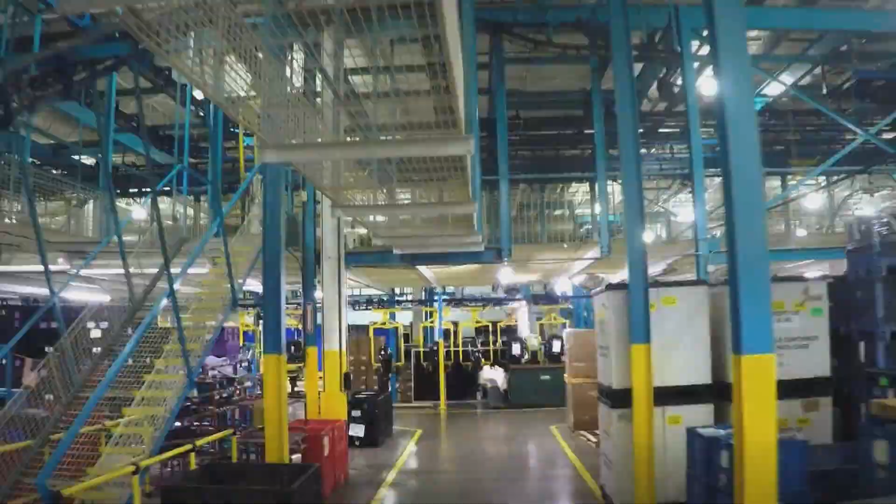Ah, lake life. It's hard to beat a great day on the water. Water sports have long been a favorite summer pastime, and they continue to grow in popularity, most notably wake surfing.

You might think you need the ultimate wake boat to get out there, but there's one company in Minnesota producing products to ensure everyone catches a wave. And they're headquartered where else? Right here in the land of 10,000 lakes.

I grew up surfing in California, and being landlocked, I'm like, what a better way to get out there and enjoy the water than to start wake surfing.

Chris Clover's longtime love of riding waves inspired him to start Mission Boat Gear. I just looked at the boating market. The boats are awesome, there are great board brands out there and equipment, but there's not a boating accessories brand that really stands out. And he did just that. From day one, Mission has been creating waves in the boating industry, pun intended.

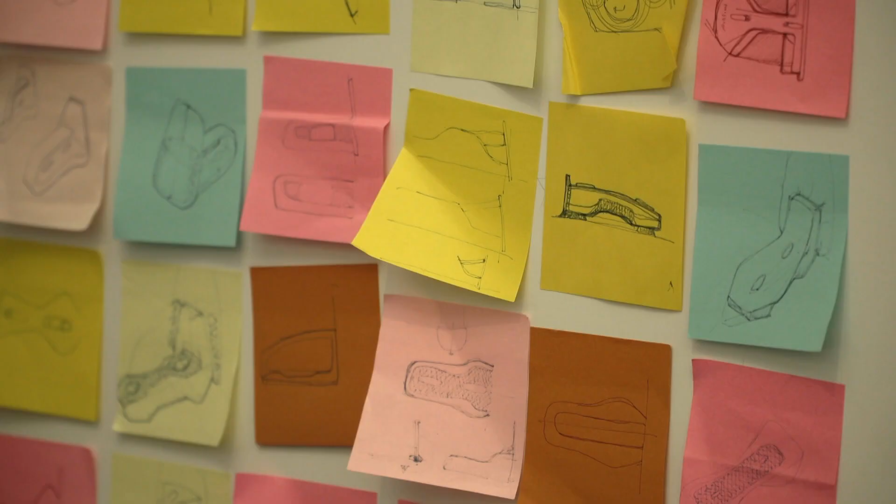Mark and Chris make it sound simple, but they clearly spend some serious time on research and development. Yeah, I gotta pick this up because this looks a little different than the product that we made or we're about to make today. Hello?

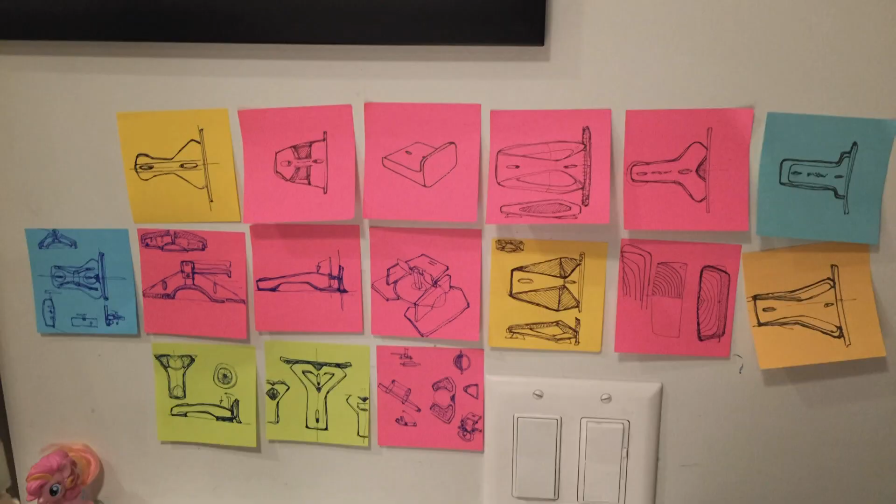So this is one of the early prototypes. There's probably another 50 or so of these things kicking around the back. Just how many prototypes? I would say 100, countless, yeah. There's pictures of us with our stocking caps on in the back of the boat in the late fall with a jigsaw.

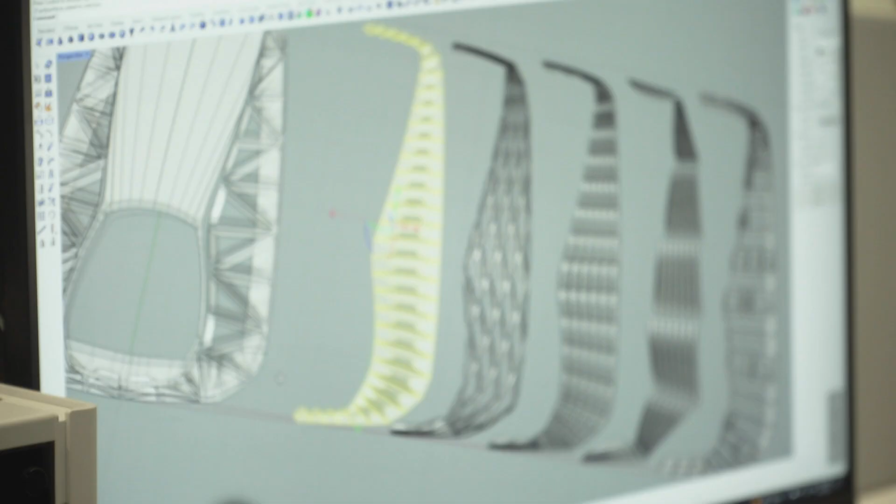A process that has since been perfected, and it starts right here at Mission HQ with engineering. So I'm an industrial designer by training, so it's more of an art-based program. It's closer to a graphic designer than an engineer, but focusing on three-dimensional products.

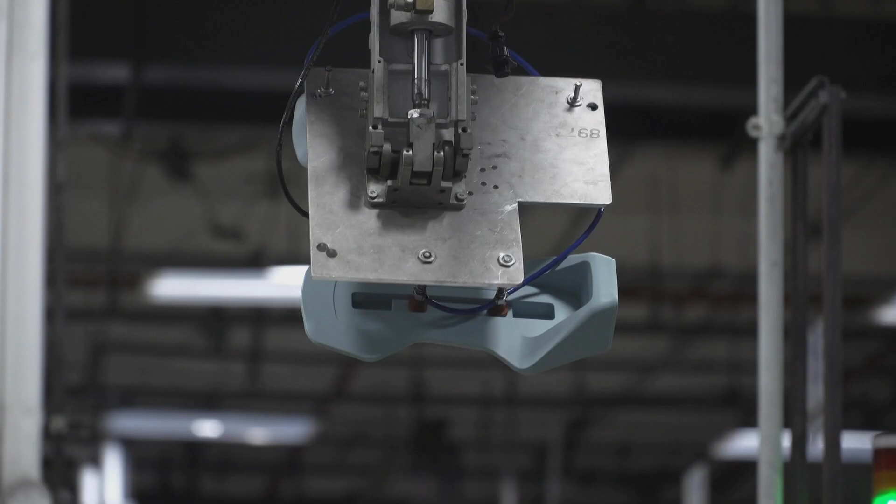When Chris has the final design, it's sent over to Plastech Corporation, where the Delta starts to take shape. Oh god, the next batch is coming. I gotta hurry. When we get back, we head there to see how it's done.

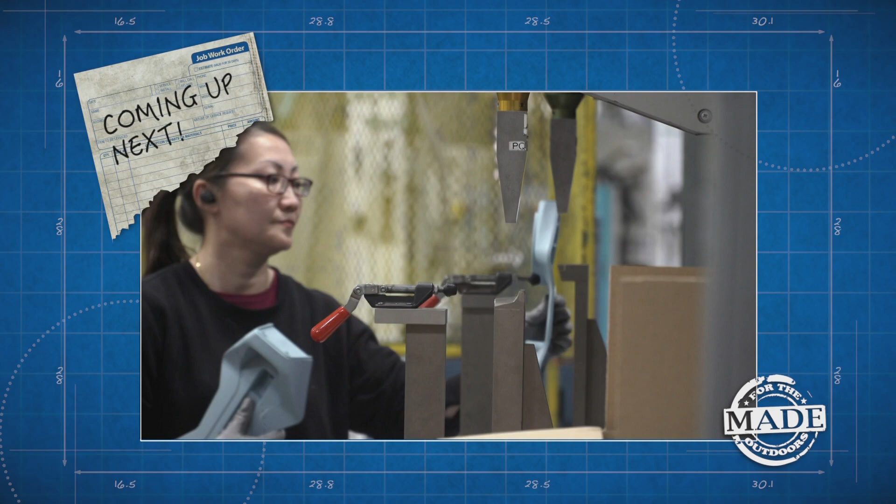Mission Boat Gear's first product was designed for the sport of wake surfing. But their goals transcend the water.

When we think about what Mission is and how we identify the business, it's an outdoor recreation and lifestyle company. We are on a mission to create innovative products and bring things to the market that actually help people get outside and have a good time.

Having fun means fun products, but it all started with this. Delta is an amazing product. It is product number one. It's the reason that Mission is really on the map.

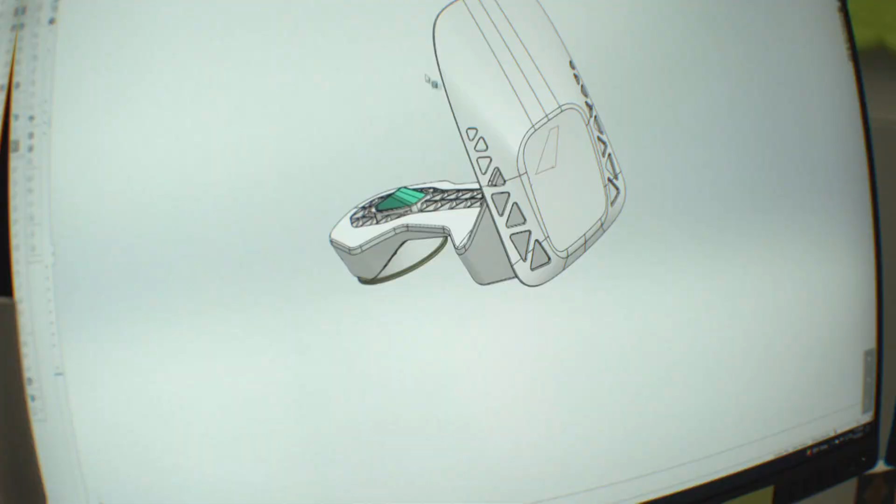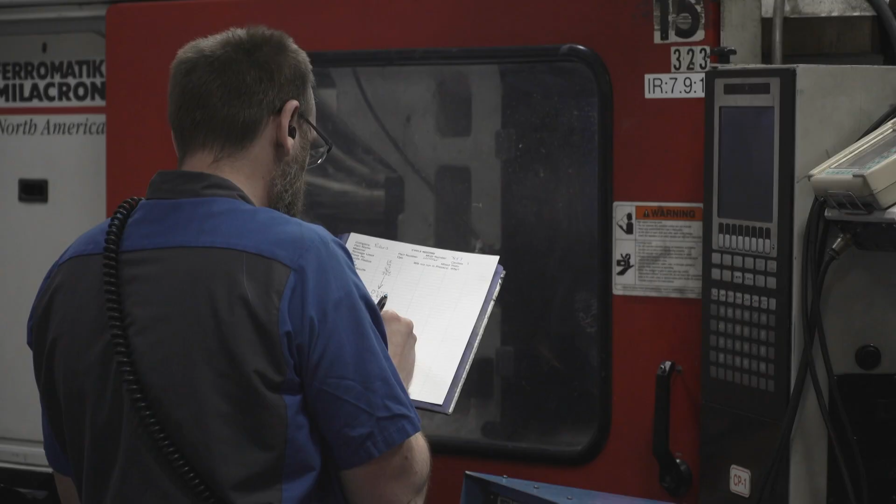Once engineering drawings are finalized, they're sent to Plastech Corporation in Rush City, Minnesota. That's when longtime Plastech employee Alan Johnson gets started doing what he does best.

Plastech is a custom injection molder. We do custom injection molding, so we do not have any proprietary products, we mold parts for our customers. We're a 24/7 operation. We've been in business about 65 years.

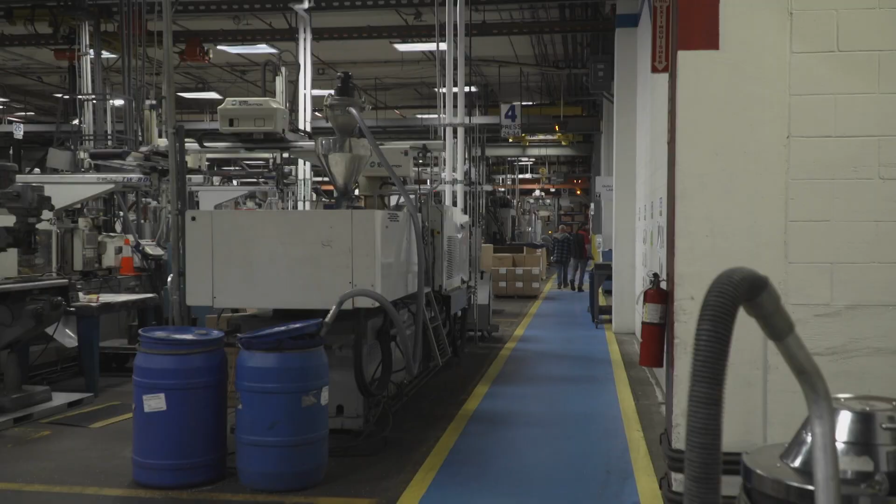65 years, and Alan has been here for most of it. 49 years, long time, my whole life. When it comes to the Delta, he knows it inside and out.

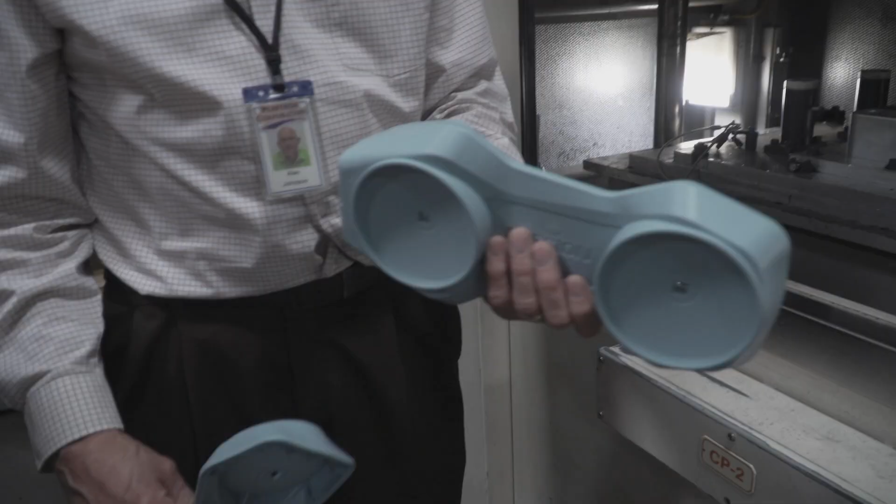The injection molded parts that we make here is the main body, which is the top and bottom. We make the soft suction cups that actually hold the device on the side of your boat. And then there's a little lever, a little blue lever on top. That's what you pull to release it off the side of your boat.

Alan, why don't you show us what we're working with? Let's take a look. Today we're molding the main body components, which starts with raw materials.

So here's some of the raw material. You see the white part? That's a natural polypropylene resin, just like milk jugs are made out of. And see the little pieces of blue? That's the concentrate dye, that's what makes them blue.

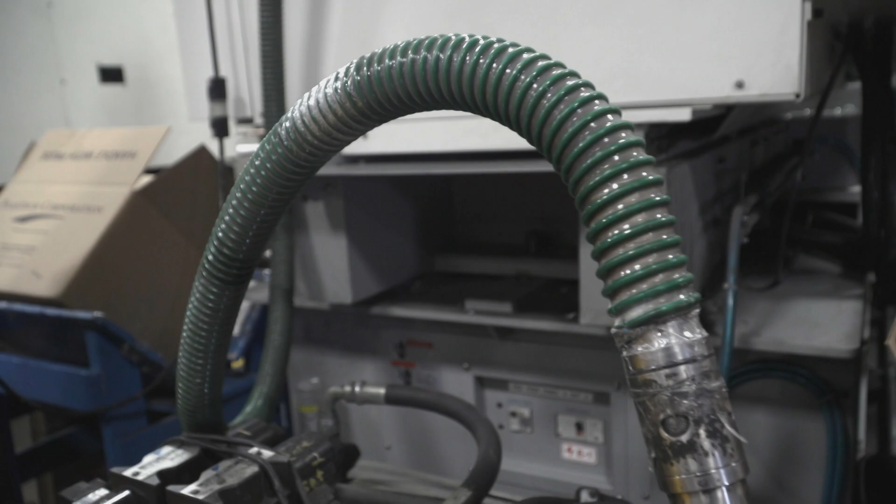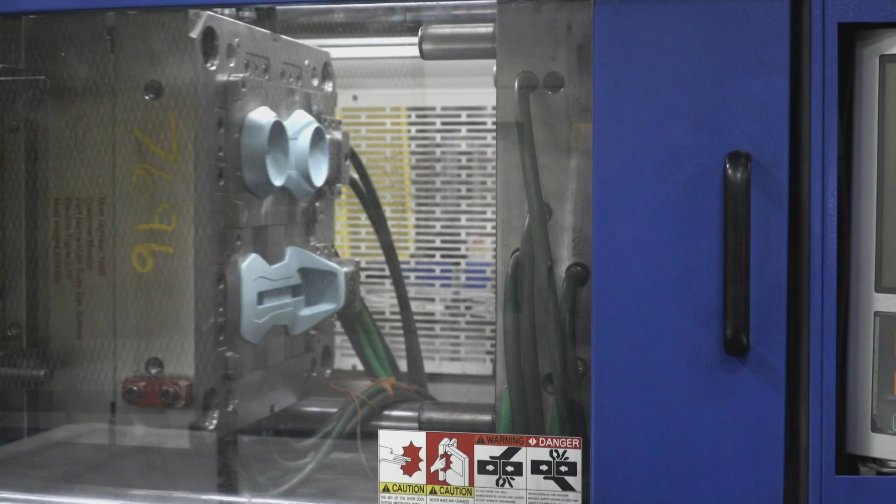The pellets are loaded into the injection molder and heated to 440 degrees Fahrenheit. From there, the liquid resin is injected into the mold. It's cooled to room temp in a matter of seconds, and voila. The whole injection molded process still intrigues me, from pellets to parts in a minute.

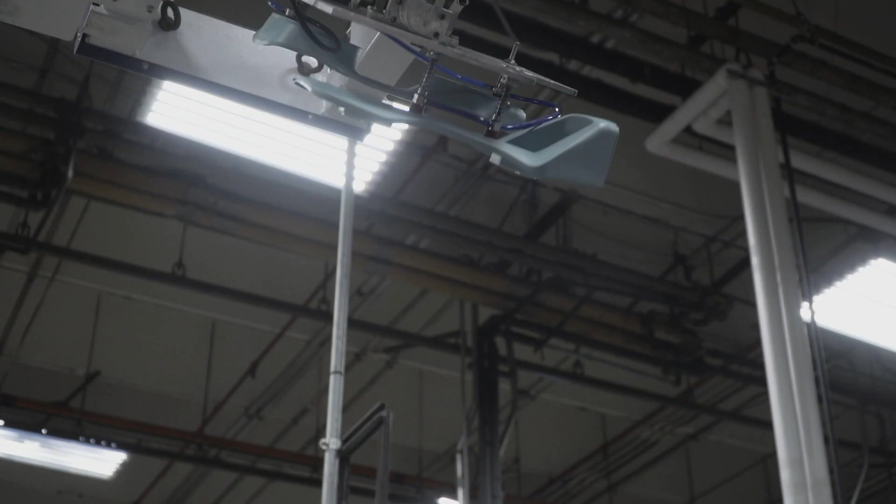A robot picks the components from the mold and leaves them for an operator like my new friend, Amy Vang. Her job is to oversee the sonic welding process.

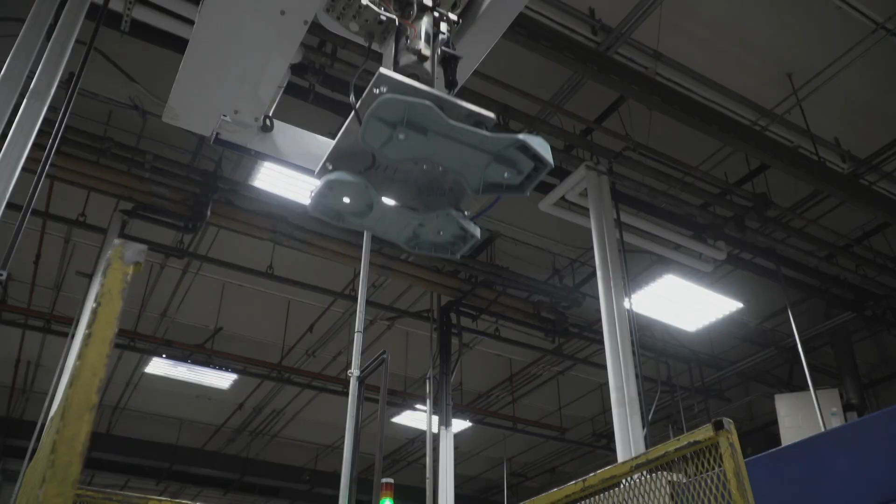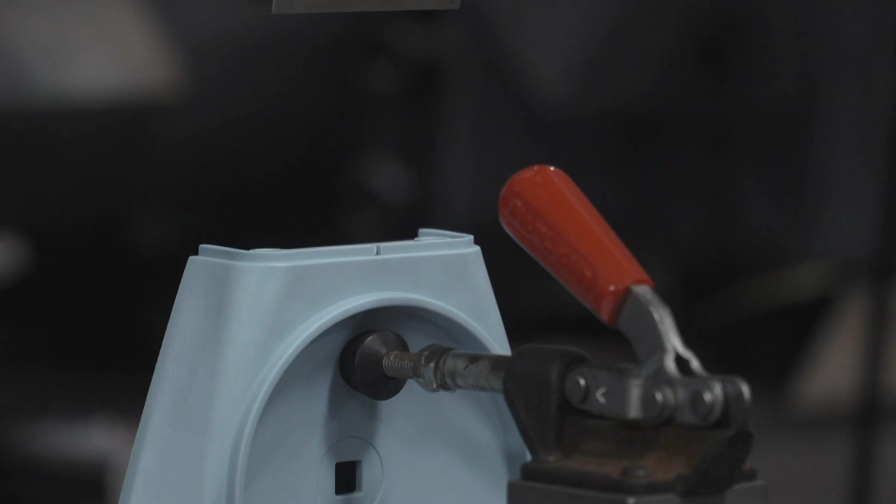So when I get my product, I look at it, making sure that there's no dye streaks, there's nothing wrong with it. So I place it on here. It fits a certain way. Put in my inserts, hit the two black buttons. Take it off. And there you go. Inserts are in and good.

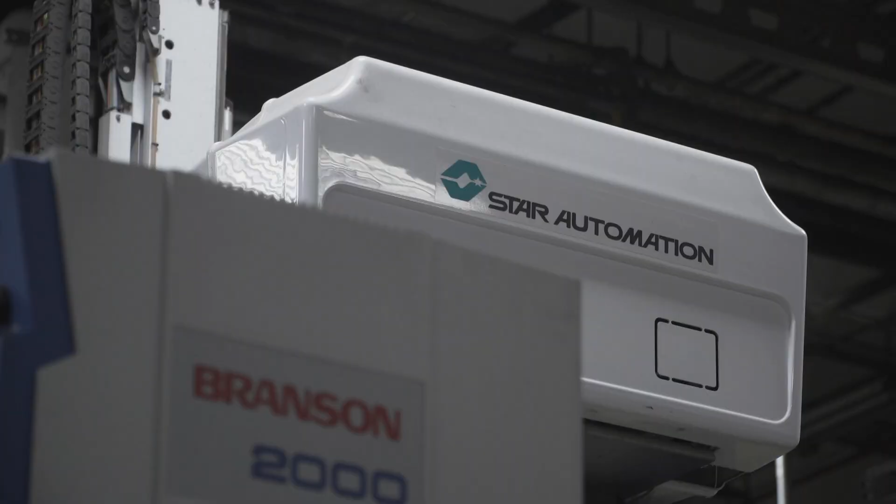All right, so we're waiting for our next parts to come down. Those are mine. Kind of a game. You have to make sure you're done by the time the next parts come out. I kind of like that. We'll see if I still like it once the real game starts.

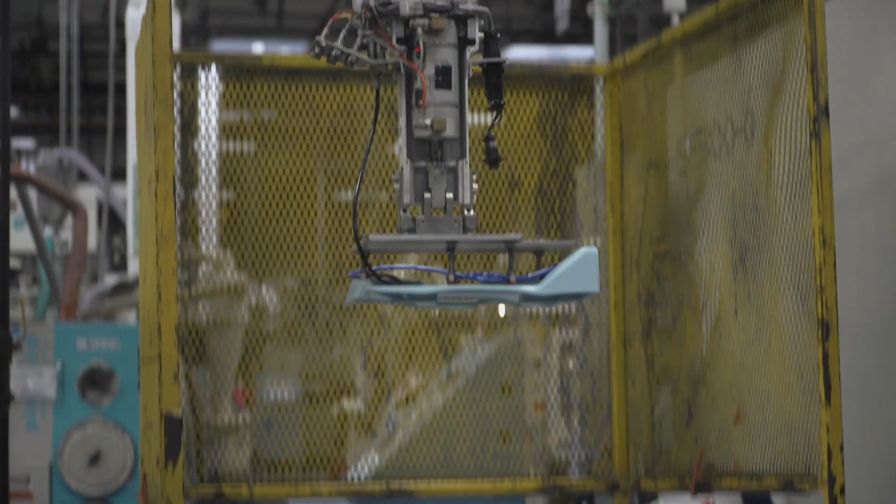Hey, incoming. It's pretty interesting. When they come down off of this, they're still very warm. So they're warm on the hands because this just got melted and now it's back cooling down. So it's kind of cool. All the way to the bottom, right?

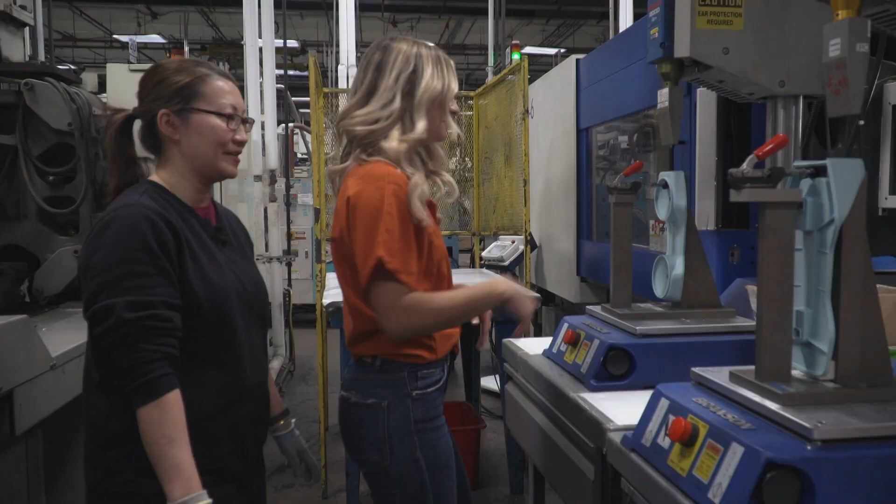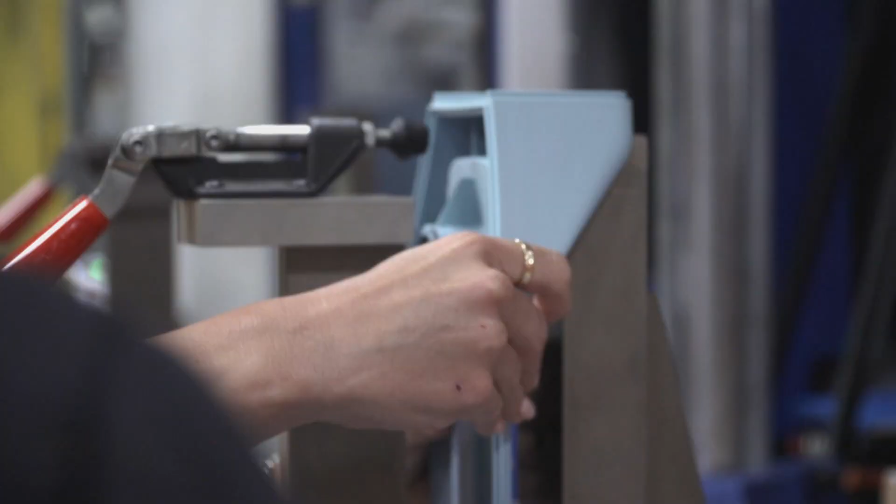Oh God, the next batch is coming. I gotta hurry. Okay, boom, boom. Woohoo, that's kind of fun. This time goes in this way, right? Okay, got it. Comes off, nice and flush. I gotta get out of here, I'm holding her up.

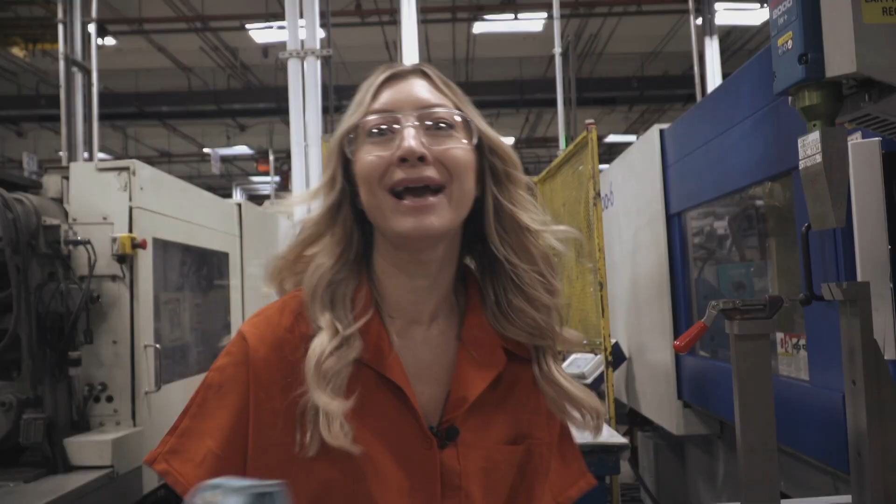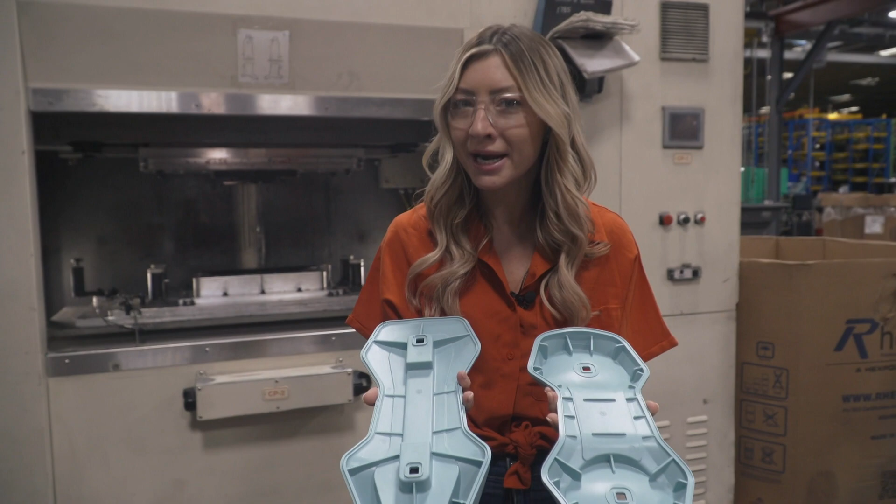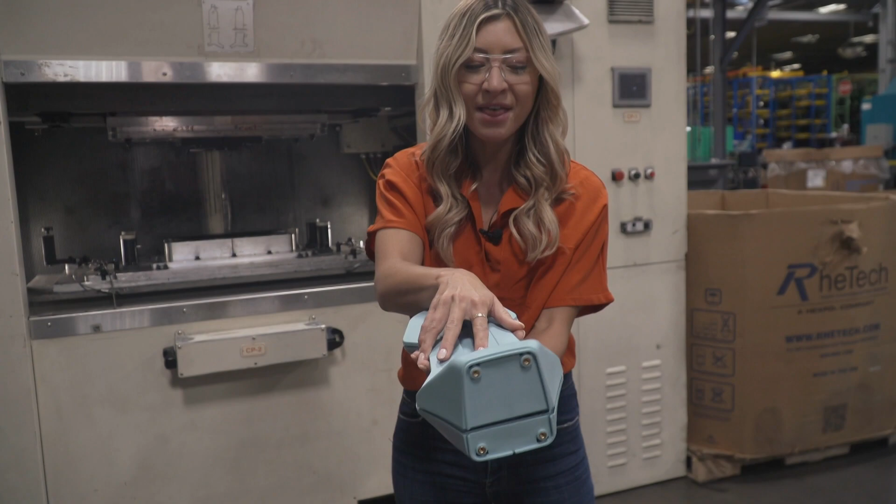We've got our main body parts all done, and now they're headed to vibration welding. Let's go. Our two main body components are ready to be put together, and it's a pretty unique process. Put that in there, and that in there. So what's gonna happen is these two pieces are gonna come together, and that vibration is gonna cause enough friction that it's gonna melt that little ridge and create a watertight seal and come out as one solid component.

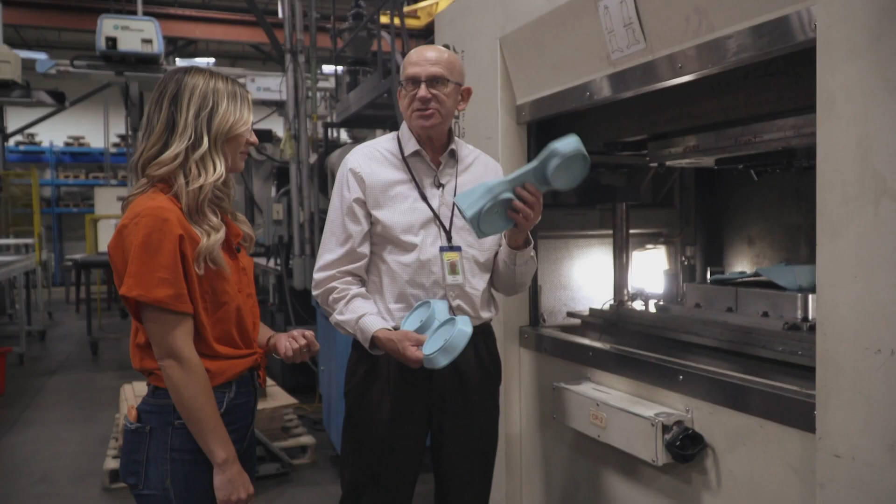Hey Alan, what do you think of our finished component? Now this is then ready to go out to the assembly department and be assembled into the finished product. That easy. That easy.

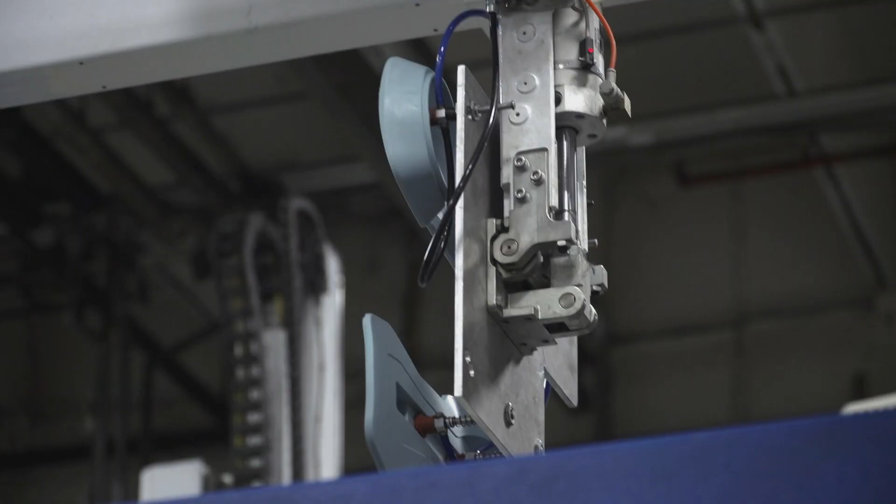Welcome back to Made for the Outdoors. We made it to Plastech Corporation here in Rush City, Minnesota. They do all kinds of different plastic injection molding, including all the plastic components of the Delta.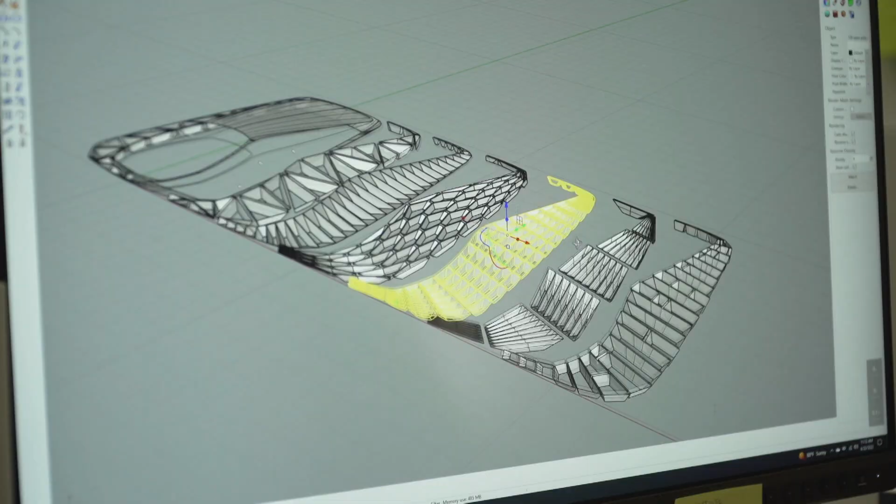Mission Boat Gear's Delta product has gone from 2-dimensional to 3-dimensional. This is then ready to go out to the assembly department and be assembled into the finished product, and into our hands for assembly.

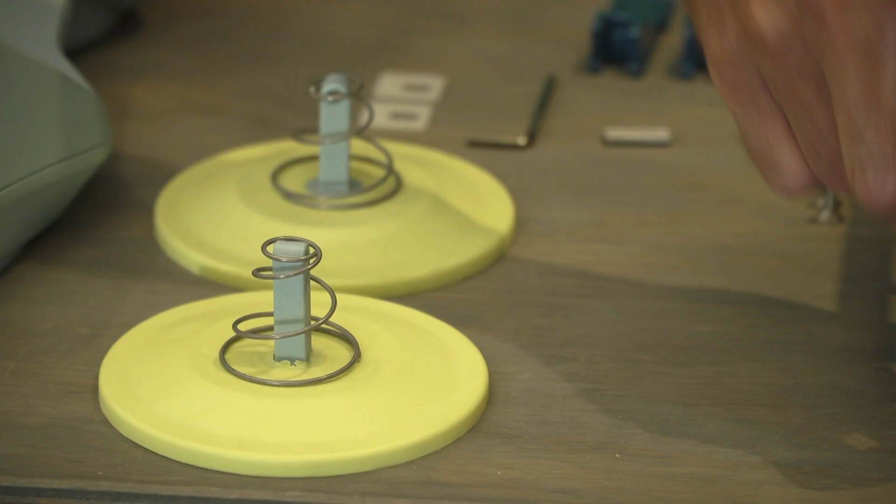So we are ready to assemble our Delta here, and typically this doesn't happen in-house, but I'm kind of gonna make you guys a test here and make sure you still know how to put this together. Do you think you're up for the challenge? I'm ready to accept the challenge.

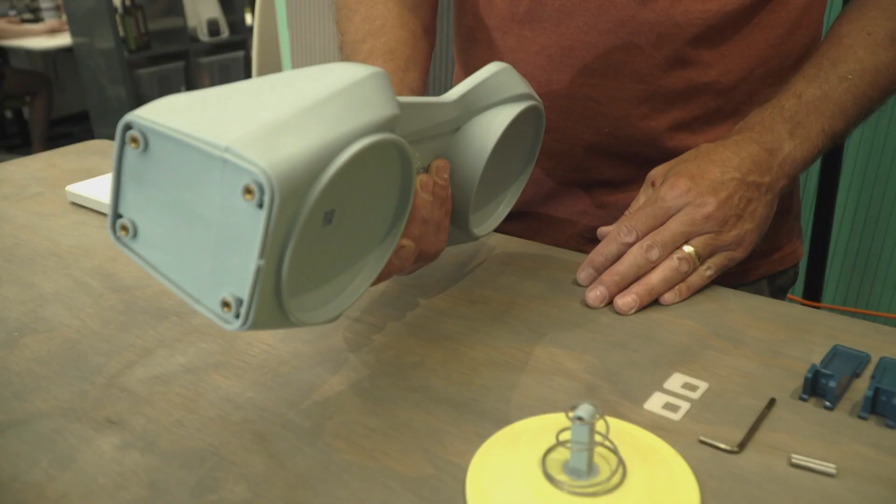I love it. Okay, so first, let's talk about all the different parts that we have here. We can start with the main body. This is basically the foundation of the entire product. It's got an attachment in the front for the mount, the main plate. And then there's suction cup features here that will mount the suction cups on, and that's what attaches the Delta to the boat.

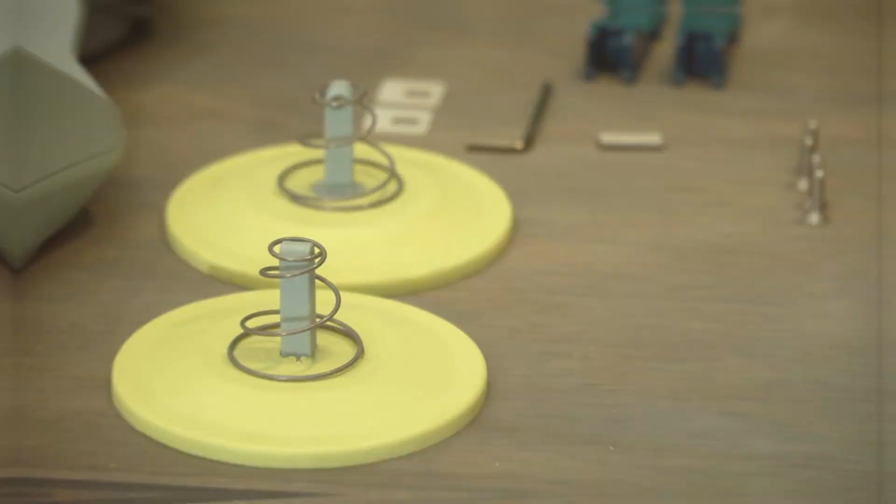So these are the suction cups. There's something that's specifically designed for this particular product. They've got a loft in there so they'll adhere easily to boats that have different curves and shapes into them. And then the springs help attach the suction cups. We got the levers that apply the force that really seals that down tight onto the boat.

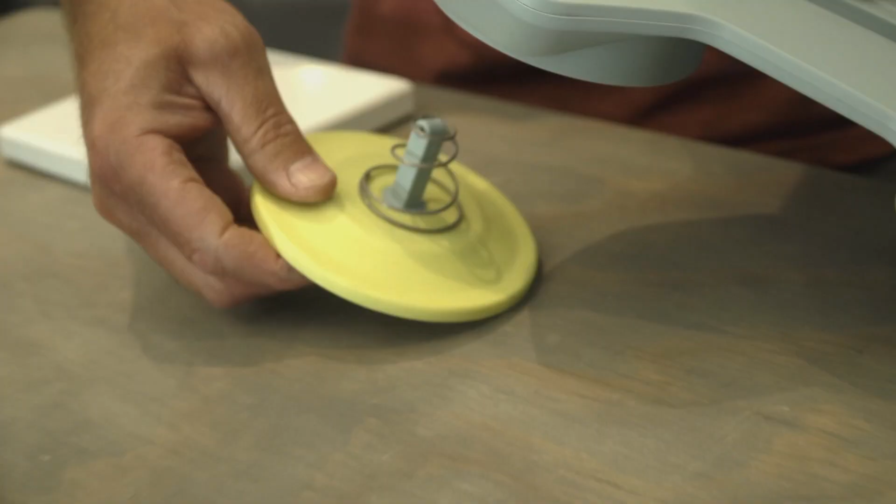All right, let's put this thing together. We're just gonna take these suction cups and we're gonna install these. Pop this lever on there. Lever number one. And then we'll go ahead and do the second one. You can see the levers now move and pulls that suction cup down nice and tight.

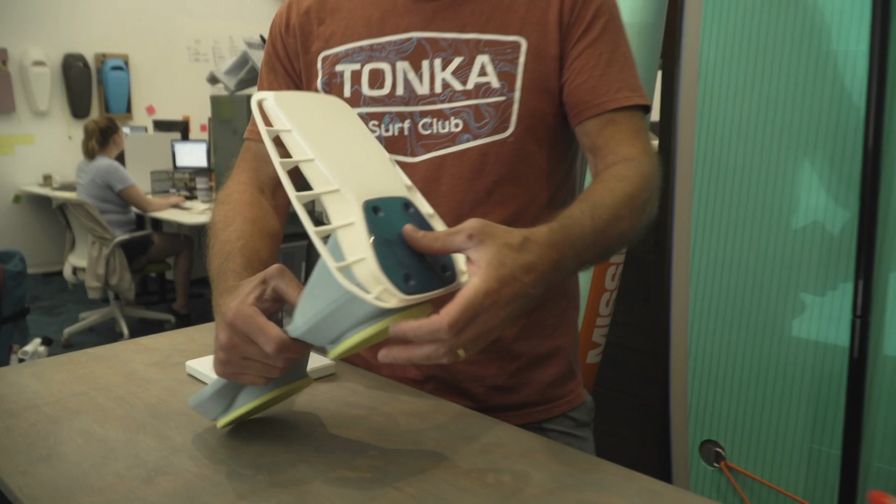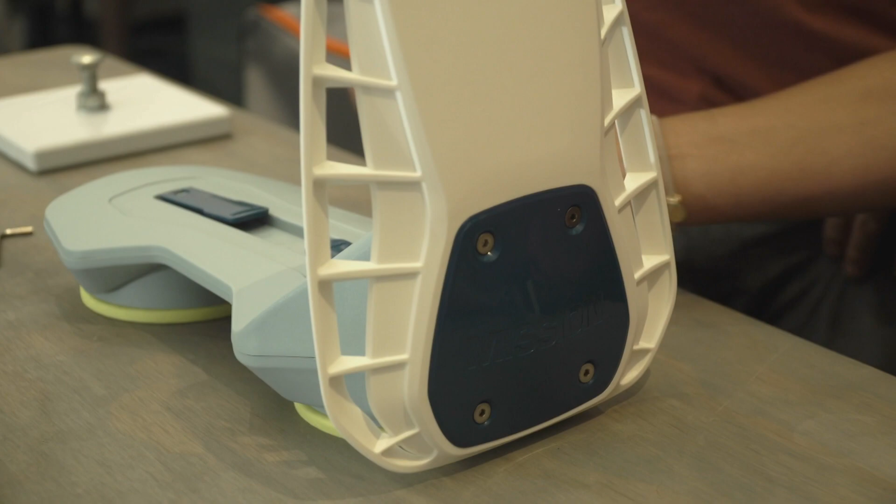And then the next step is really just putting on the faceplate. We'll just put these two pieces together, and it comes in the box without the faceplate on. Well, that's really all that they have to do to put it together. Easy. Yep, we're ready to roll. Boom, the finished product right there. Amazing. Like I said, it looks pretty simple, but it's actually very sophisticated, and just wait until you see it in use.

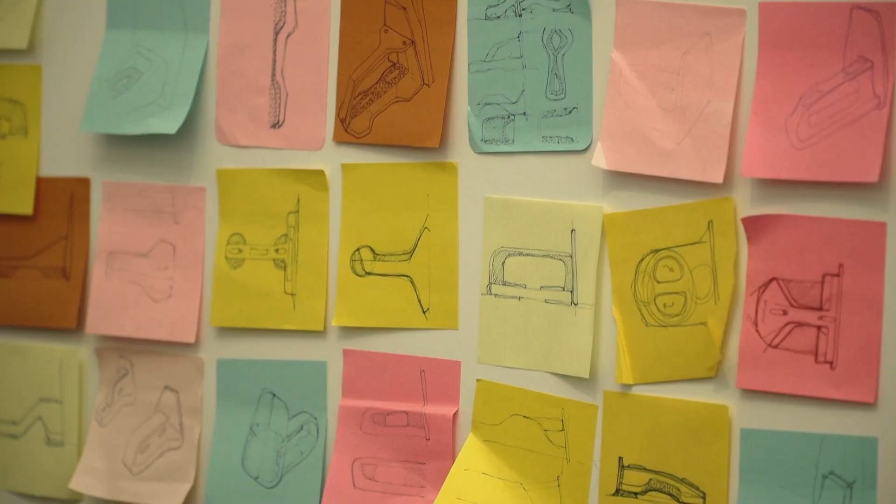From notepad sketches to functioning product, our Delta Wake Shaper is ready to hit the water.

Our strategic path forward is to think of ways that we can bring accessories and lifestyle products into that market and serve a customer base that's extremely passionate and loves going outside. So we'll do everything we can between now and the end all of Mission to put as many smiles on people's faces as we can with the products that we bring to market.

Thanks to Mission Boat Gear, whether you have a boat designed for surfing or not, the surf is always up.